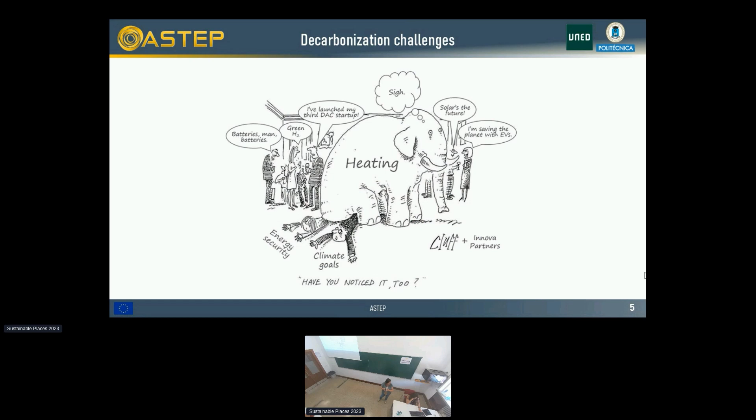I like to start these presentations with this slide, which is, I hope you can see it from a little far away, because we're all worried about decarbonization and renewable energies, and we talk about PV, electric cars, batteries and hydrogen and everything, but the actual elephant in the room is heating, and heating is what is actually really pressing the climate goals and energy security. So I really like this slide.

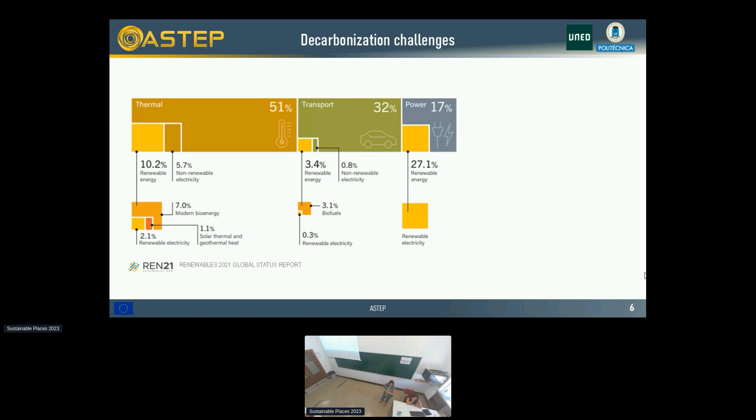What this means is that we have, of course, challenges decarbonizing. We have a big consumption in power of non-renewable energies. The yellow squares are the ones that are renewable. Of course, in transport, there's a big challenge to overcome too, but the thermal challenge is the biggest. We have the consumption of 51% of thermal energy, and only 10% is renewable energy. Can you click, please?

Coming back to the slide, the priority right now for most of the times that we see is that we're gonna decarbonize the power matrix, which it's great. I mean, I am not an enemy of that, absolutely. We'll talk about electrification, especially regarding transport, and we talk about energy efficiency. All these alternatives are absolutely necessary and are great, but they are not enough to overcome the thermal problem.

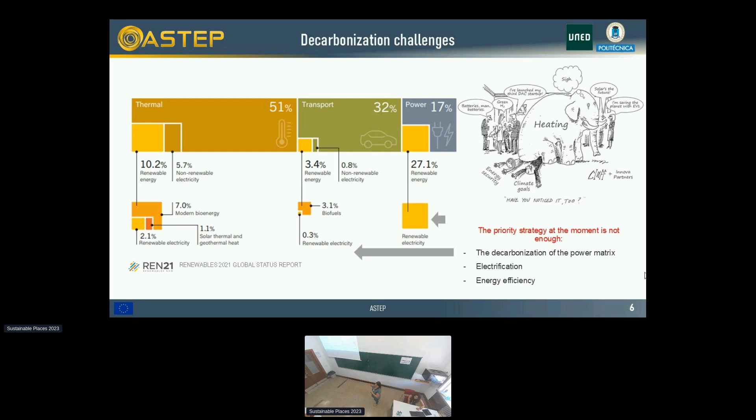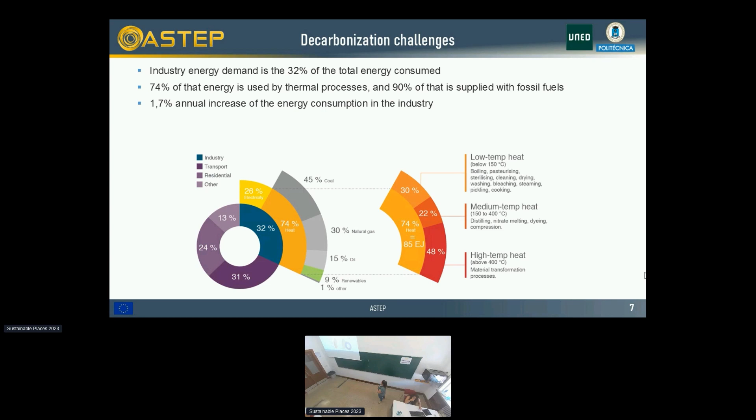We have seen this slide this morning too, but it's a very good slide to explain that we have a problem with the industry, which is 32% of the total energy consumed, and 74% of that energy that the industry consumes is thermal processes, of which 90% is fossil fuels. So that is the challenge that we do have to address. And we probably keep increasing the energy demand of the industry. It's not something that we can actually reduce. So that's also another challenge that we have.

And here is where the solar thermal technologies come. We were talking outside during lunchtime, and there were people saying that we have to improve the technology. I don't think the technology is such a big problem. I think the technology has pretty high technological readiness levels, TRL. They have been demonstrated, shown that they work, and they are reliable. So I don't think that we have to keep improving the reliability of the technology. Maybe we have to improve how we can apply this technology to industrial processes. So I'm not saying there are no challenges in the technology, but there are other challenges when we apply the technology to the industries.

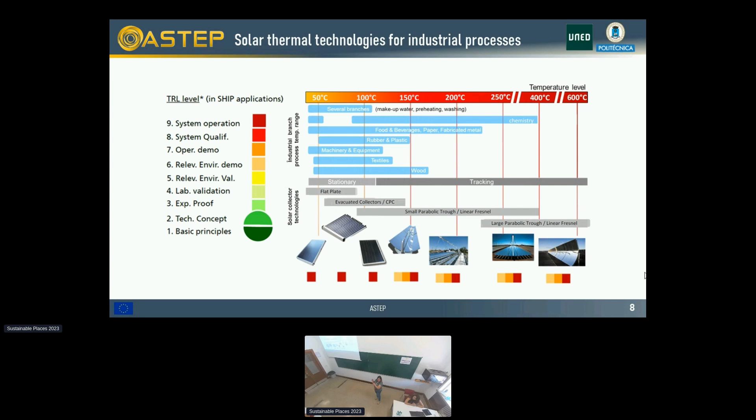Cost could be one of them, but costs are actually reducing. Here I'm showing two commercial examples, that's why I like to include them. One of them is industrial solar, the one in Jordan. And the one on top is Pampa Elvira, which is a mining industry in Chile. I like to show them because they're commercial, so it's good to show that it's not only research projects. And there has been an economy of scale and prices are reducing.

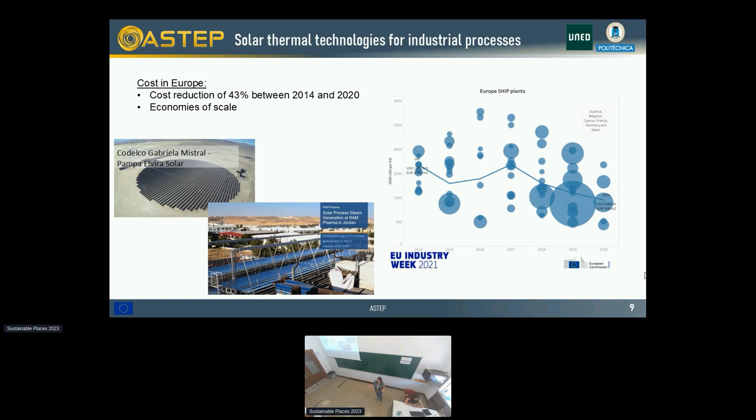Maybe we still have to reduce a little bit more. But there are other challenges that we have to address. First is the high capital investment at the beginning, that's a very scary thing for industries. Of course, the reliability and durability - these systems need maintenance, and sometimes industries don't care about the equipment, and that's a bad thing. Of course, the solar energy variation - we cannot stop producing a product because there's no sun. So here's where we come to the last point: we need storage, or we need an auxiliary system. And of course, availability of land and performance in high latitudes are also challenges that we need to address.

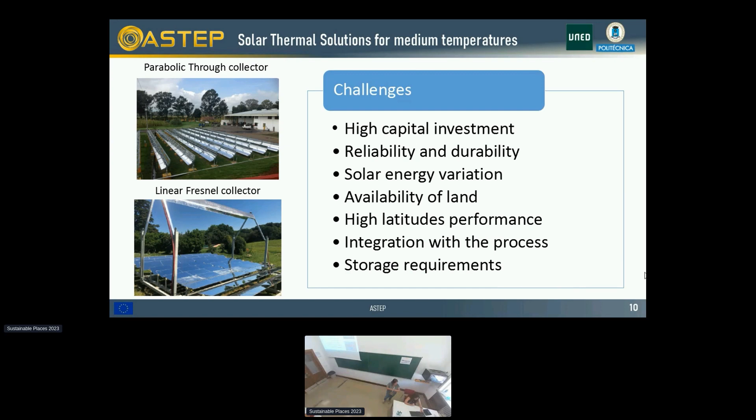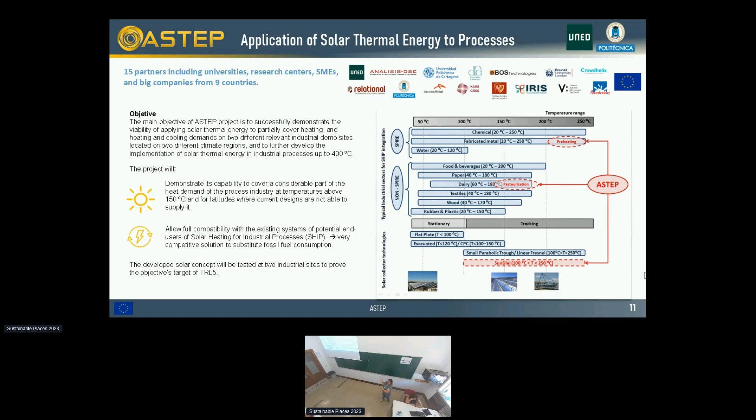One of the features that the ASTEP system we're proposing has is the modularity and compactness of the collector. Magdalena is going to talk a little bit more about the system itself, so that it's easy to move and install. As I said, it's going to be validated in two cases: the one in Greece, which is a dairy industry, where we're going to tackle the pasteurization process which needs 8 bar and 175 degrees. And the one in Romania is 220 degrees, and it's going to be used for preheating some metal tubes that need coating.

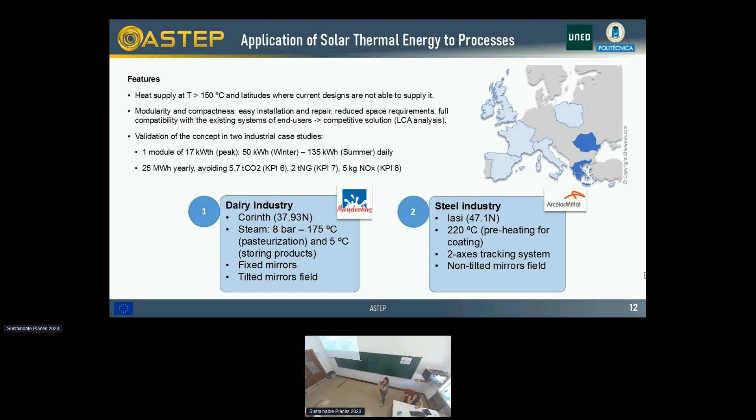Now Magdalena is going to talk to you a little bit more about the technical aspects of the system.

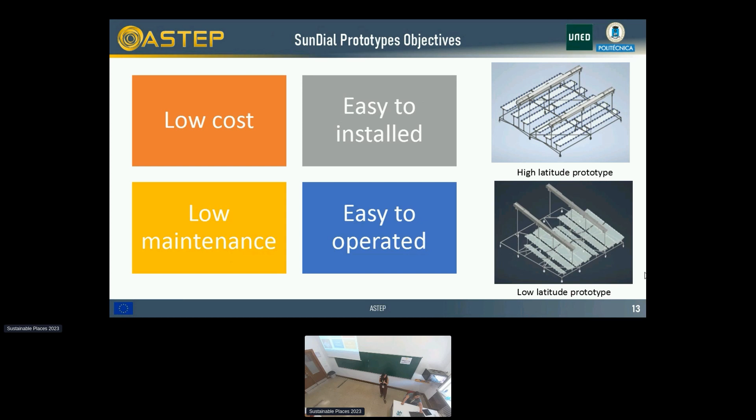Thank you, Mercedes. Well, I'm Magdalena. I was principally involved in the construction of the solar collectors and also the dynamic simulation of the whole ASTEP system. So we have two prototypes: one was specially designed to operate in high latitudes, and the other one is for low latitudes. The principal objective of this solar collector was to challenge the main barriers in the industry with a low-cost collector that is also easy to install, low maintenance, and easy to operate. In the next slide, I will talk about these features.

So here we have the solar collector for low latitudes. It's a Fresnel collector type and is mounted above a rotary platform. The square platform has wheels and can rotate, so the sun is always in the symmetry of the plane of the Fresnel collector. The low cost is achieved principally because the mirrors are built with regular non-solar mirrors of 3 millimeters thickness, and the process to bend the mirrors, which you can see in the diagram below, is very easily achieved with 2 grippers and an endless thread. So the shape of the regular mirror is adjusted with this mechanism.

Another benefit of this collector is that all the mirrors are fixed, so it has less tracking motors, and that also decreases the cost of the collector.

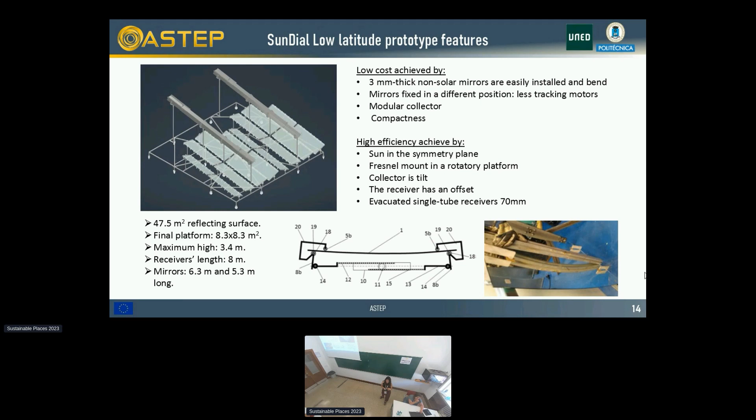To improve efficiency, the Fresnel is tilted, and the receiver has an offset to reduce end losses. The next prototype, designed to operate in high latitudes, differs from the previous one in that this collector has a 2-axis tracker, so the platform rotates and the mirrors also move, allowing the collector to follow the sun's trajectory.

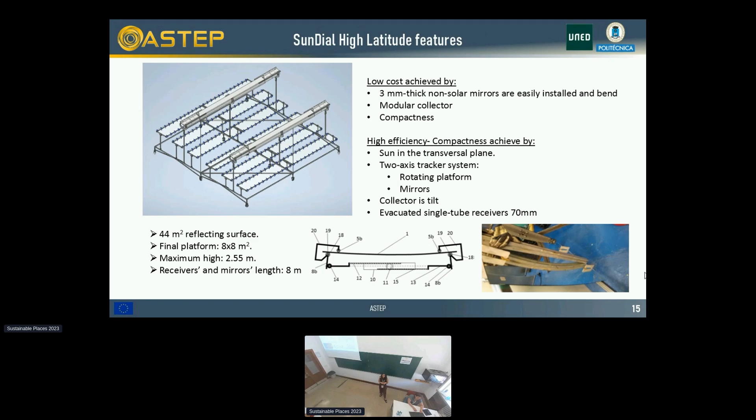This platform is smaller than the other one, more compact. The mirror materials and mirror bending system are the same as the previous collector. This collector will cost higher, but it can operate and produce heat efficiently in latitudes where actual commercial technologies can't. The receiver is a common evacuated single tube of 70 millimeters in both collectors.

The system also includes thermal energy storage. We selected a latent phase change material storage because it has higher energy density than sensible storage, so the volume will be 4 to 5 times smaller. The tank was especially designed for this project, with tubes that have a special metal insert with a flower shape that increases heat transference between the salts and the heat transfer fluid that flows inside the tubes.

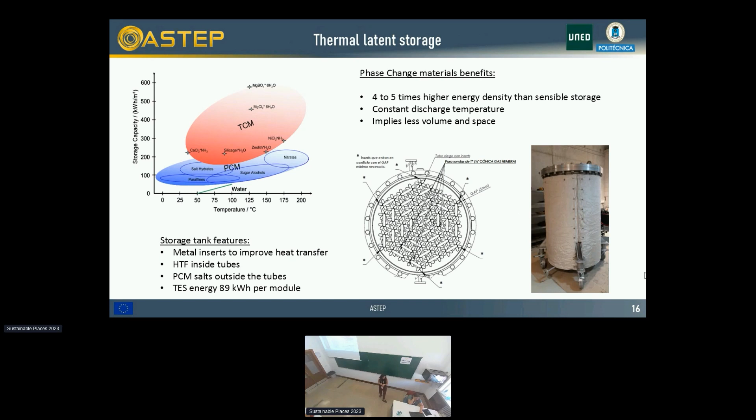Here we have a diagram of the whole process. We have the solar field connected in series with the thermal energy storage, and two heat exchangers to provide energy at two different temperature ranges. The priority for operating this system is to use both heat exchangers connected in series at a high temperature set point, but in low irradiation scenarios, the first heat exchanger can be bypassed and the system can operate only at low temperature, achieving more efficiency in those scenarios.

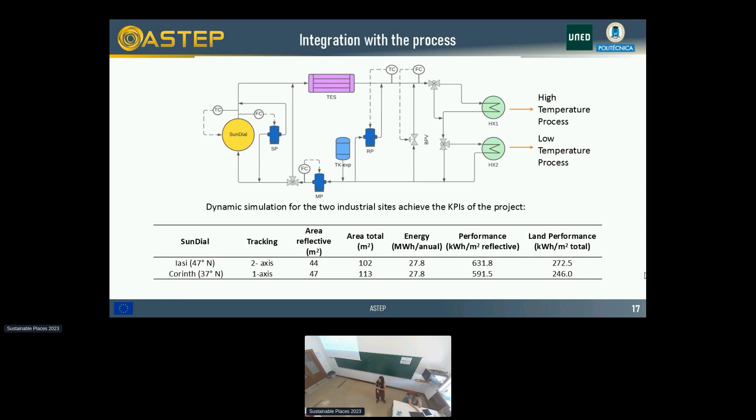Here we have pictures from 2 days of operation, in summer and in winter. On top we have the power results for the location in Greece for the dairy factory, and at the bottom we have the temperature results. We can see above that in summer, the solar field can provide energy to the process all day and all night.

In winter, the thermal storage can't store at full capacity, but the chiller couldn't continue working at night. We can also see that the high temperature system works at 205 degrees, and the low temperature system works at 95 degrees.

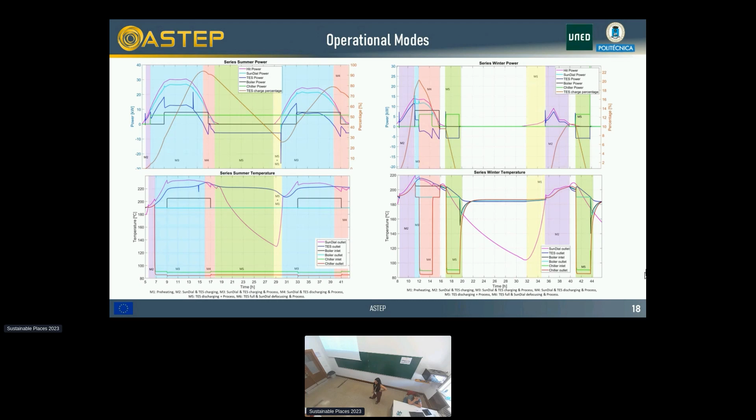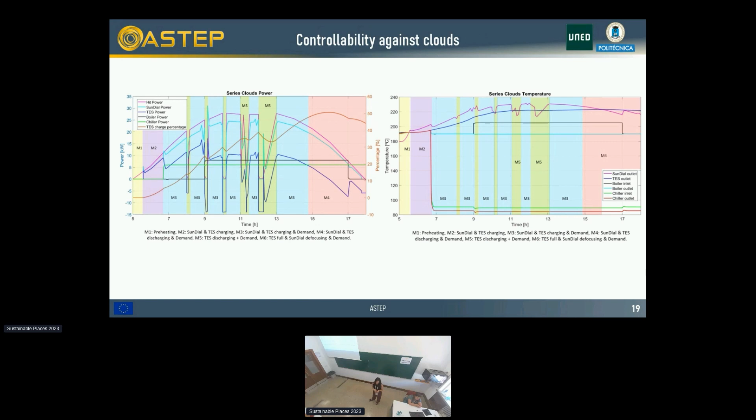Finally, we carried out an estimation of the levelized cost of heat. We haven't finished constructing the prototype, but we estimated a cost for the low latitude solar field of 179 euros per square meter, and for the solar field for high latitudes of 228 euros per square meter. That gives us a levelized cost between 45 and 50 euros per megawatt hour.

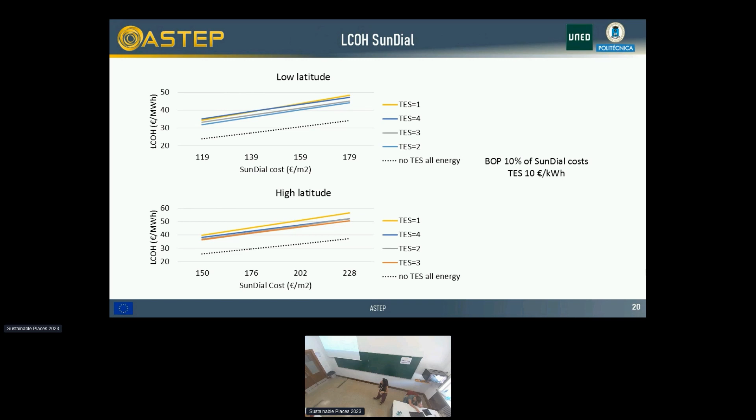But we think that thanks to scaling up and other benefits from better analysis, since this is a very small prototype, scaling up with mass production could reduce this cost by about 30%, achieving a lower levelized cost of energy.

To sum up, with the system, the annual energy was optimized using this control strategy with two temperature demands. The performance of the system was reliable even on days with clouds, and the solar field cost at low latitude was driven down principally because of the use of stepper motors and the mirror bending system.

Also, the sundial's high efficiency and compactness is achieved because of the two-axis tracking system. To sum up, the ASTEP project was developed with the needs of the industry in mind, and part of this objective was to develop technology that is easy to install, maintain, and operate.

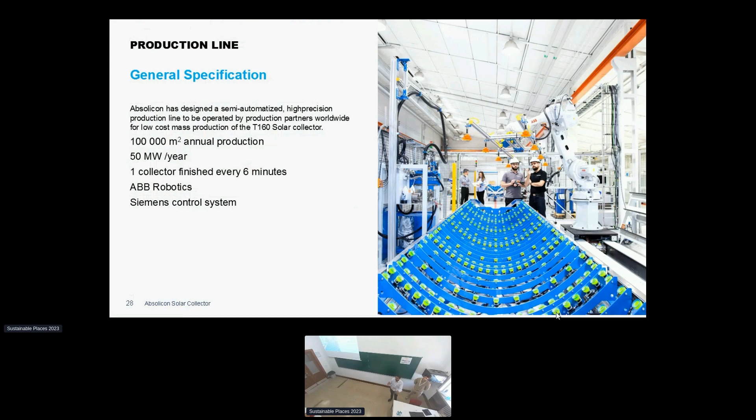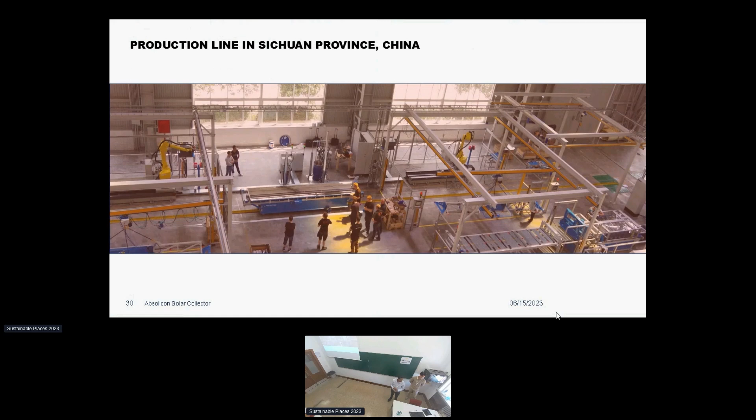That's the idea. Of course we do small installations because with solar thermal, we know no one will buy a production line of 4 million euros until they see the technology working. So we've done small installations at different places to build customer confidence. We have a production line in Sweden and one in China, and recently we sold 2 production lines, one to Canada and another to Egypt, even though Egypt is a tricky market, but we managed to sell it there.

And then I give the floor to Puneet. I don't want to present this slide.

One of the goals in the Friendship project is the need for visibility. How do we push solar thermal solutions to be more visible under the shadow of other popular solutions? Solar thermal is a hidden and less marketed technology. There are several reasons: few technological suppliers, very few people know about it, very few installations compared to other renewable electricity technologies, and a perception of being complicated.

This was discussed in the last session as well. If you compare PV and solar thermal, PV seems simple, but it's actually a photon hitting a panel, triggering a photoelectric effect, electrons moving, generating electricity. That sounds more complicated than a water pipe heating water, right? But it still works, and customers don't need to bother about the physics of the PV module, and that's why it seems so simple.

This is what we need to get in the solar thermal market: a ready-to-fit solution which works, where the customer doesn't need to see whether it's generating steam or not. That's when I think the perception of it being a complicated technology will go away, but I think it really isn't, once it's standardized.

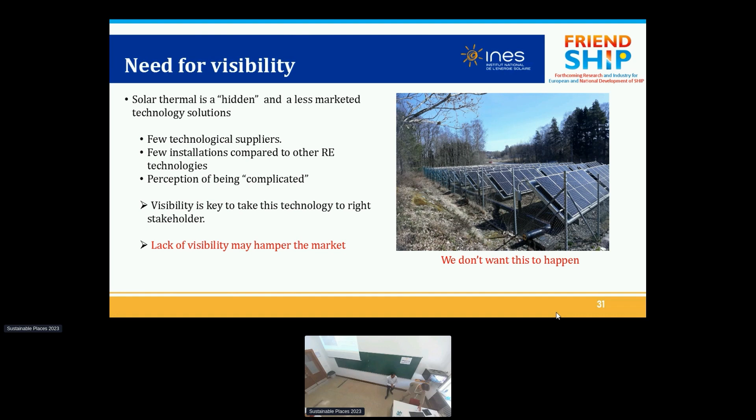Thank you, Puneet. So at INES, in the Friendship project, we were in charge of creating and enhancing the visibility of the solutions and the different bricks that compose them. We proposed producing educational e-learning videos for potential end users to explain the technical content of the project, and to provide industry and decision makers knowledge to understand the solution and be more confident about it. We also approach industries with an acceptability study, and communicate on these two subjects via social media and website. We set indicators for these two tasks: the number of industries reached with the videos and survey, the response rate of the questionnaire, and the number of views of the videos.

About the acceptability study, we want to obtain the industrial views on the solution, the global industrial view, the first impressions they had about the solutions. To do that, first we created an industrial contact database with all the members of the Friendship project, and we created a questionnaire on two broad subjects: the acceptance of the solutions, how they think about solar thermal globally, and evaluating the compatibility of the plant with the solution proposed by the project.

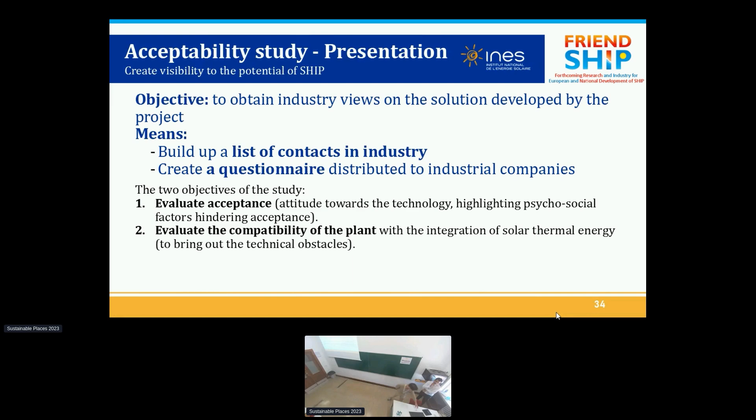So we used two strategies to disseminate this survey. We begin with a quantitative approach, using social media, websites and emails to diffuse the survey in mass and reach the maximum number of industrials, to obtain numerical results and statistics.

We also do a qualitative approach with the close industrial partners we have in the consortium, to obtain more specific answers and more specific data on the views of these industrials.

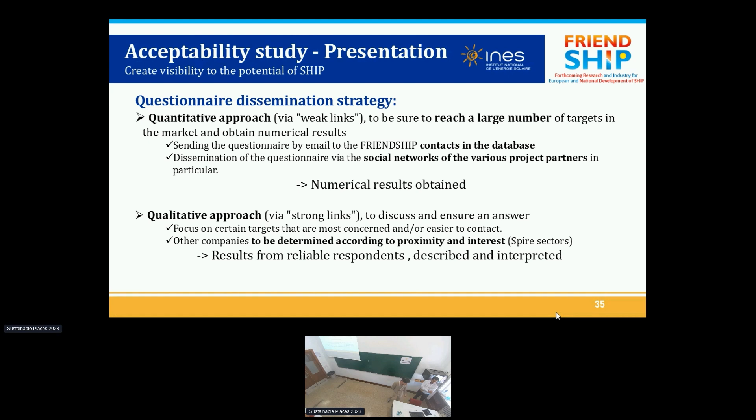About our other activities to enhance visibility, we created e-learning videos about the project. The first video presents the global context of the project and the global vision of all the bricks of the project without entering into details. We put this video in the survey.

The survey we sent to the industrials. We also created 3 more technical videos, destined to decision makers but also more specifically to the technical members of industries. We bring details about all the bricks of the Friendship solution, about the solar collectors, the thermal energy storage, the chillers, etc. It's accessible on the Friendship website.

And the fifth video we will produce will be the presentation of the prototype, which is in construction in Grenoble, in the CEA, and the commissioning will be maybe at the beginning of 2024.

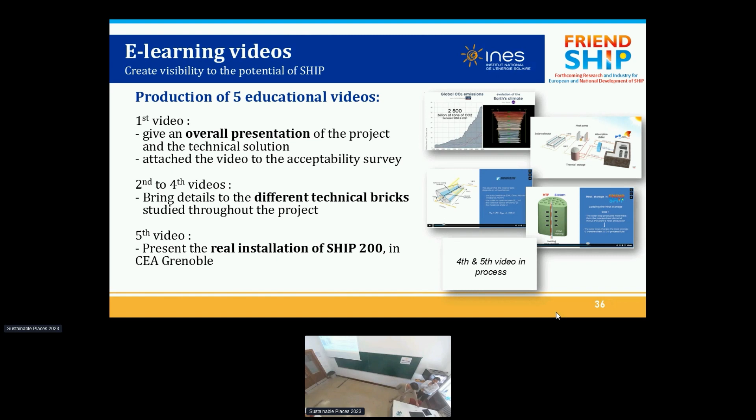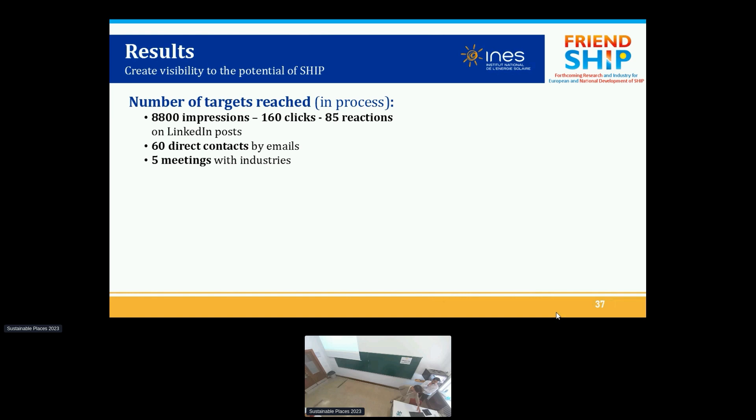So for the results so far of the survey, I put some data and results so far. We got some numbers of impressions on social media, some interest about the project. It enhanced the visibility of the project. We made some meetings with industrials to present the project and have a more detailed view of their constraints. We also count the views of the videos.

But when we approach the industrials and talk with them about the project, it works very well, and we had rich answers from them about their constraints and their approach to the Friendship solution.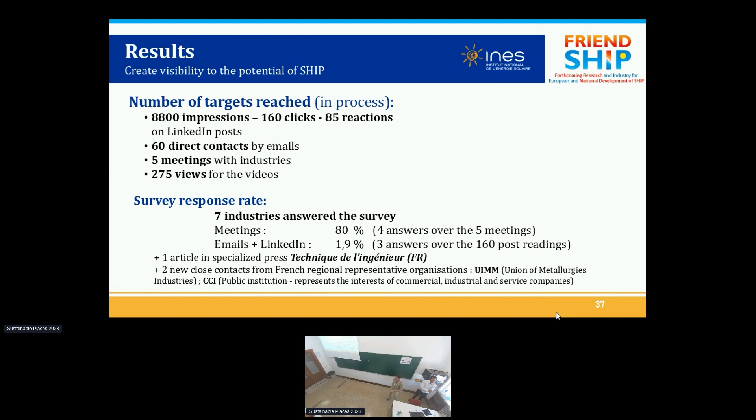So this work gave us an indication of the difficulty we have reaching industries and making contact with them to assess their interest in the solution. It's really a concern - I think for the solar thermal solution it's important to create really good arguments for the solution from the research side, and yeah, it was very difficult to reach the industrials.

We also bring educational material to make this kind of solution more familiar and attractive to the potential end users of the solutions.

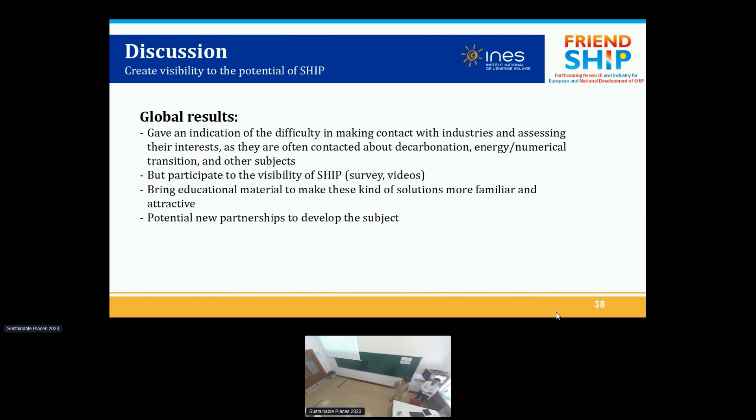So we discussed the solutions, and one of the most promising ways to enhance the visibility of solar thermal is maybe hybridization with other technologies to enhance the growth of the field. And I will let Punit discuss this topic. Thank you. Great, thank you, Ben.

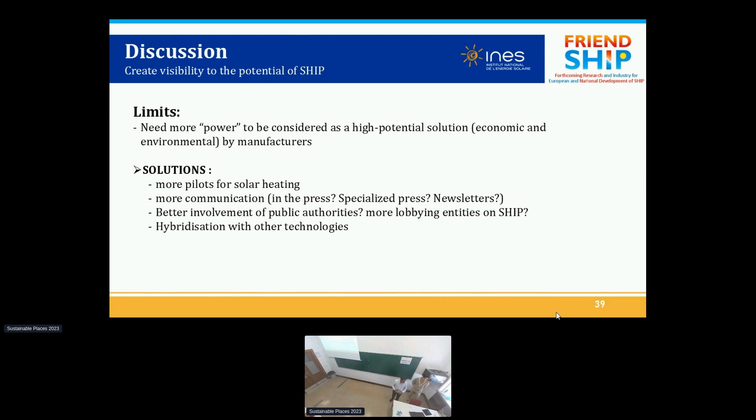Yes, so solution, as Per said, basically we need more pilots. Actually, probably it shouldn't be pilots because I think solar thermal has seen enough pilots now - it should see more commercial scale projects, large scale projects operating as defined in the project proposals. And then we need hybridization with other technologies. So I will touch on these 2 points.

I'll give 2 examples here on more pilots. They are key to obtain stakeholder confidence, and of course they are good for learning and research possibilities, even though they are installed on customers' premises. There have been a lot of pilots on hot water generation, 90-95 degrees Celsius, but there are few for steam applications. That's where it gets very complicated, because the steam system itself is not so easy to tackle. So we have done some installations, and I think we need more pilots for innovative concepts.

I'll show 2 examples here - 2 pilots, recently commissioned by Absolicon. They are not done as part of any research project, but are basically implemented using customers' money or in a heat purchase agreement as well.

What I would like to promote here is that any stakeholder, or researcher, is really welcome to contact us, and we will arrange a visit so you can see the pilots. Even if it's other technological suppliers, we are very open. You could say no problem.

This is an installation in Karlsberg, Greece, in Thessaloniki, for a brewery industry. It's a solar field of 660 square meters, and it generates steam at 150 degrees Celsius. The steam generated is being fed to the pasteurizer of the brewing process, and the system is expected to generate 354 megawatt hours per year. We have just a few months of operational experience, but we are satisfied with what we have got, and the idea is to extend this field further to a larger scale.

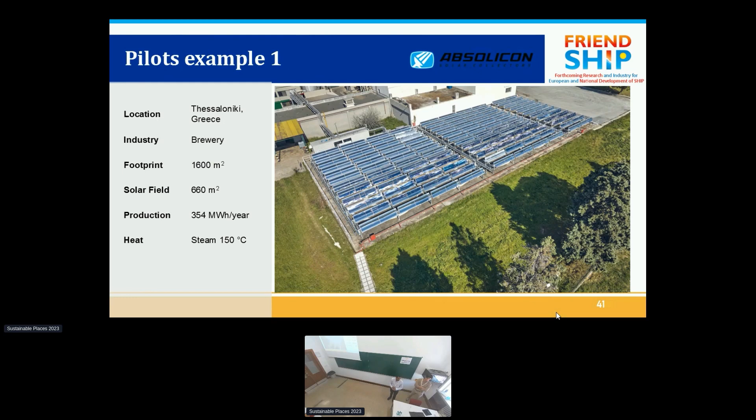This is another example, in Bari, Italy, for a beer company called Peroni probably. It's a solar field again of 660 square meters, and here it co-generates both steam and hot water: steam at 150 degrees Celsius and hot water at 85 degrees Celsius. Both are fed to the pasteurizer. It's a specific case because the pasteurizer can take both steam and hot water, but that's not usual in industries. We have also employed an energy storage tank.

If you can see here in the picture, do you see? Yes, exactly. So this is the storage tank here, and this is a containerized solution called Solar Central. That's basically all the balance of plant that you see. And these are the lines which go to the industry for steam and hot water.

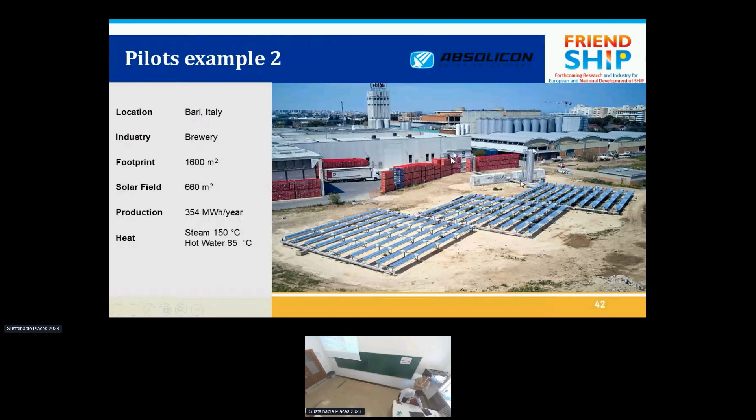We have talked a lot about solar thermal, and I think probably everyone in the solar thermal world would agree that there are many problems. One of the biggest is storage. Storage is very expensive, and the implication is that you cannot reach a very high solar fraction, or percentage of demand met, for industry. So if I am a solar supplier, I go to industry and say, I looked at your data, I propose 50-60 euros per megawatt hour of heat, but we only meet 20% of your heating demand. The customer says, yeah, good, but what do I do with 20%? What about the rest? The rest will still be using fossil fuel.

That's where I think we should leverage the advantage of solar thermal, which is that it can produce a very low levelized cost of heating up to a limited solar fraction, because the curve for levelized cost of heating just keeps increasing once you introduce storage. So there are two ways to tackle it: there's a need for better, cheaper storage solutions, and there's hybridization, or working with other technologies, not seeing them as competition but as complementary technologies.

Here I'll touch upon an example from a real case industry. On the x-axis is solar fraction, percentage of demand met, and on the y-axis is LCOH. What you see is that you start from 0 solar fraction, go up to 15-17% solar fraction, and the levelized cost of heating is flat and very low, 25 euros per megawatt hour, very attractive for the customer. If you increase solar fraction from 17% onward, you have higher mismatch between demand and production.

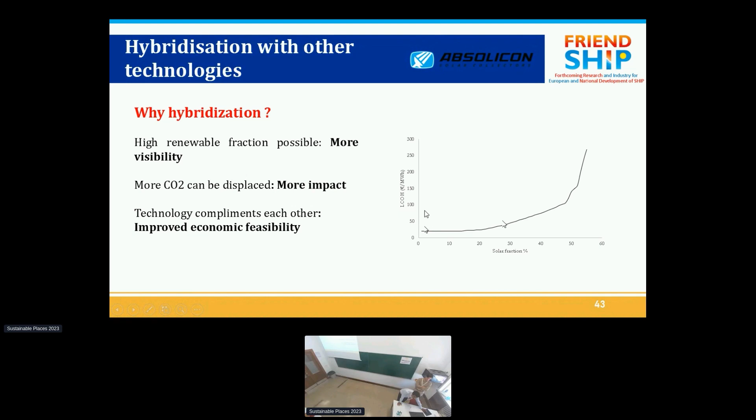So you need storage, and storage makes sense. It increases LCOH a bit, but after a point it increases a lot, because storage cost increases linearly while the energy stored doesn't increase linearly, so there's an increase in cost. We should use this low trend up to maybe 30-40%, where it's very reasonable and no other technology competes, and then use other better solutions for the rest until we develop good storage, hopefully.

This is an example of a combined solar thermal and steam heat pump solution, a concept we really push. Here, if you have an industry, you generate solar thermal from a field which can generate heating directly during the daytime, and this steam is fed to the customer during daytime. Whenever you have excess, it is stored in thermal storage, but only for a few hours, because after that it doesn't make economic sense.

And then that storage is being discharged during the night. But at the same time, whenever you are producing more, you can also store using a low pressure storage tank below 90 degrees Celsius because it's cheap. And then you can use it as a source for heat pump. So it's a win-win situation.

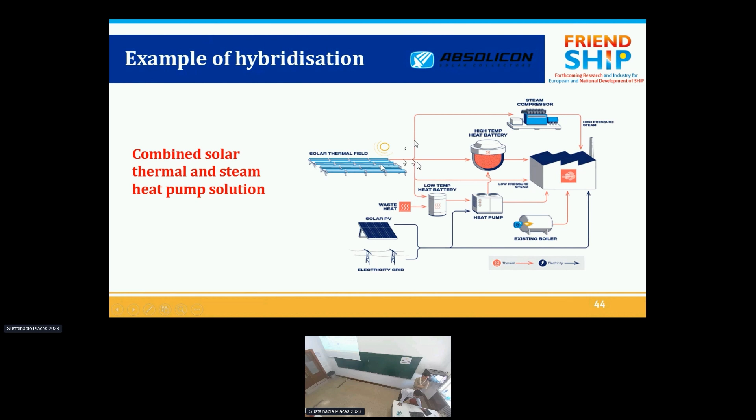You are utilizing the excess heating from solar. At the same time, heat pump operates at better COP because it's getting a high temperature source from solar thermal. And then you meet the rest of the demand from boiler if and when necessary. And if you cannot generate high enough pressure, then you also have the option for steam compressor and so on. So this is just a concept, but...

Then there is another concept which is combining solar thermal and PV systems together, because we know PV can compete with solar thermal on a cost basis, but it cannot compete on an area basis. It needs 2 to 3 times more land area to produce the same energy.

But again, PV can charge a very high temperature storage, a cheap storage solution, which solar thermal cannot, because solar thermal solutions in the market maybe can reach 250-300 degrees Celsius and cannot go beyond that. But on the other hand, if you have a PV module and a resistance heater, which can go maybe 700 degrees Celsius, it can charge a very cheap storage, such as here is an example based on sand.

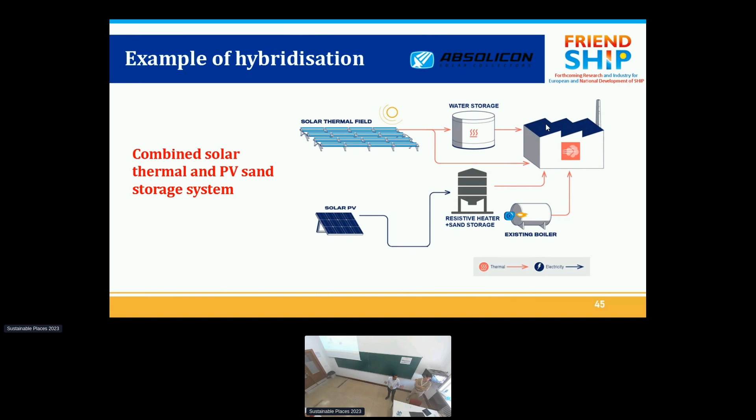So during the daytime, you generate heat, you feed it to the industry, meeting 25-30% of the total demand. And during the daytime, solar PV will only charge the storage, and the whole night time you will discharge the storage. We actually did this, and there will be a publication soon, which is accepted, comparing such a system with when these technologies are used individually. And what we have seen is that the combination makes perfect sense. It's like a marriage made in heaven.

Okay, so the summary is that despite the high potential of solar thermal, and I think the potential is still hidden, we need to promote it more, and we also need to hybridize it with other solutions, and we need to tell them that we are here to work with you. And then we need, as Pat said, more educational material, more pilot industries, more communication and success stories.

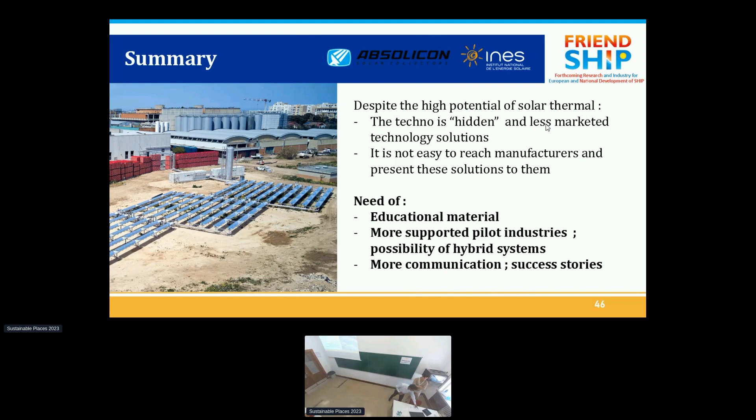Is that all? Yeah. Great, thank you.

Questions? If not, maybe I have one.

Like we're seeing that actually, the questionnaire was not very successful. So if you had to write the project again, would you write it differently? Instead of a questionnaire, would you put something else? Or would you stress more or give more resources to another part of the work you did? I don't know, like, what did you learn from this experience of the questionnaire? Maybe it's not that successful, not that relevant. Maybe.

Yeah, maybe we were too far from the needs of the industries we talk to, we speak with. Maybe it could be great to have more links between the different projects we saw this morning, like SHIP2FAIR. There are a lot of pilot industries, and maybe it would be good to link the two, instead of recreating a survey and going to industries that know nothing about the solution. Maybe it would be good to link pilot industries in different projects with other industries that are new in the field. I don't know how, but networking, yeah, networking with the other projects, the sister projects. I don't know.